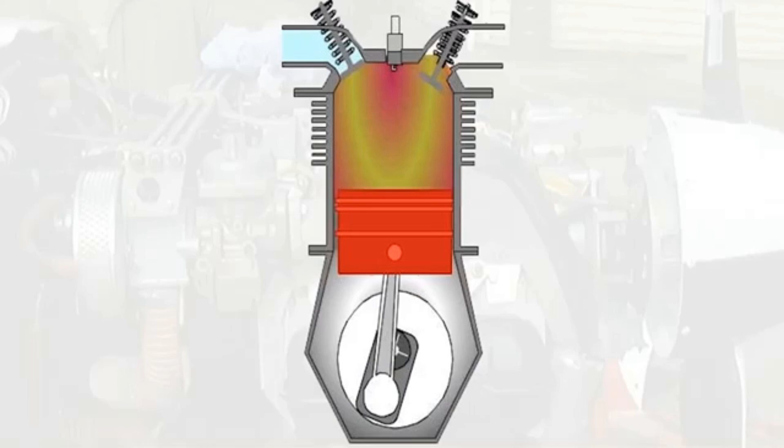A piston engine is a heat engine. Its purpose is to convert the energy released from burning fuel into mechanical energy, and by so doing, generate power that we can use.

The thermal efficiency of a light aircraft piston gasoline engine may reach 30%. This means that 70% of the heat energy released by the fuel is wasted. Around 40% will leave with the exhaust gas, but 30% stays behind to raise the temperature of the engine components and the oil.

If nothing was done to alleviate this situation, then several problems could occur. Engine components could start to fail structurally. The oil could break down and lose its lubricating properties.

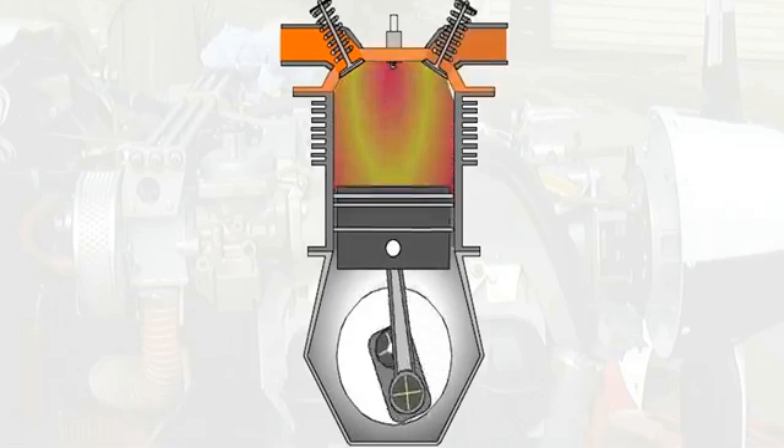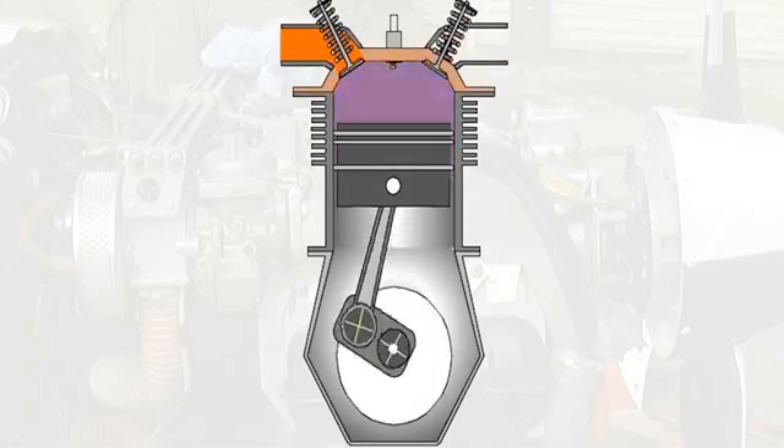The fuel could ignite as soon as it entered the cylinder, before the spark plug fires. This is called pre-ignition. Pre-ignition causes loss of power and may exacerbate the overheating problem. The incoming mixture may get too hot, which will cause unstable combustion, usually called detonation or pinking. This too will cause loss of power and further overheating.

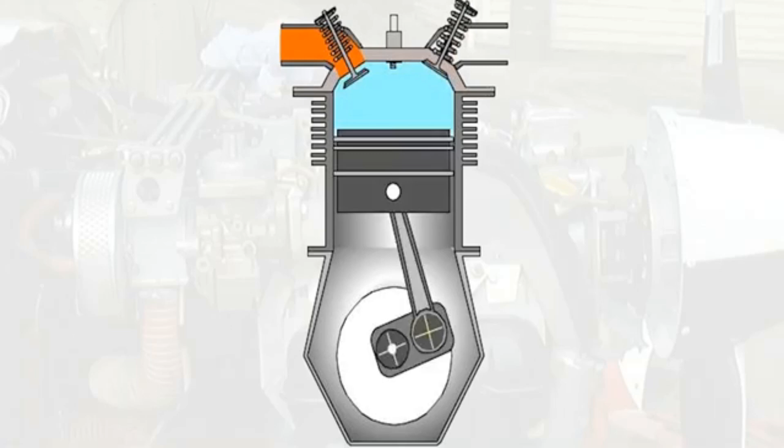So far, we've only considered what would happen if the engine overheated. Let's now look at the problems of overcooling.

Maximum thermal efficiency is only achieved at high engine temperatures. Low engine temperature increases the viscosity, the internal friction of the oil, which will reduce the brake horsepower.

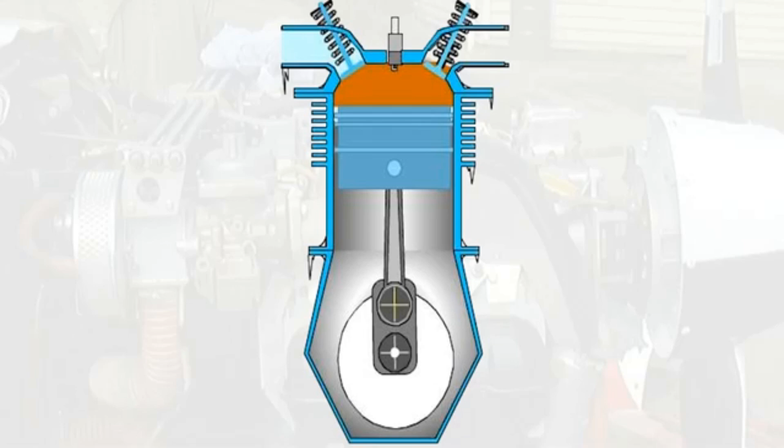To burn, the fuel must vaporize. Very low engine temperatures would prevent complete vaporization, and some of the fuel would not be burnt, reducing the power output of the engine.

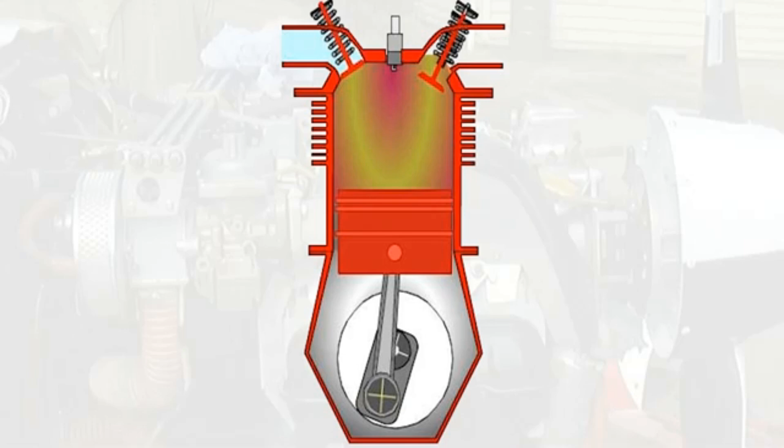To work efficiently, the engine needs to be at the highest temperature consistent with safe operation. To maintain the engine temperature within a range which will satisfy its working requirements, a cooling system is required.

Most light aircraft engines are air-cooled. The simplicity of the system makes it virtually maintenance-free, and it's much lighter than the alternative, the liquid cooling system.

Having said that, the liquid cooling system is more efficient. It gives more precise control of engine temperature and generates less drag. Thus it's used on high-performance engines.

One of the major factors governing the efficiency of an air-cooled system is the air temperature. Although the ambient air temperature can vary widely with changes in climate and altitude, it must be borne in mind that dissipation of the heat will be more rapid as air temperature decreases.

The speed of the airflow is the other major factor affecting the efficiency of the air cooling system. Uncontrolled, the speed of the airflow over the cylinders will vary with the speed of the aircraft, and therefore cause the temperature of the cylinders to fluctuate accordingly.

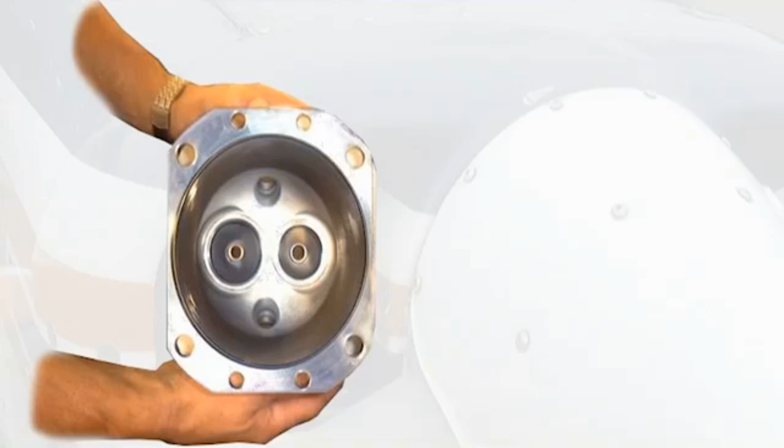Several methods of improving the efficiency of cooling systems can be employed. Firstly, the engine components are made of materials with a high conductivity. For instance, cylinder heads are sometimes made from aluminium alloys.

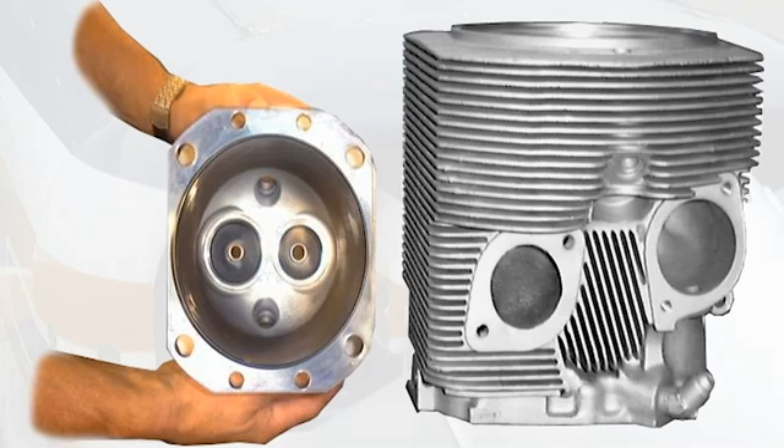The walls of the cylinders are finned to increase the cooling area. The fins are thin in section and may be extended to increase their area at local hotspots, such as the exhaust ports, in an attempt to achieve an even temperature throughout.

It must not be forgotten that the oil used to lubricate the engine is also a cooling medium.

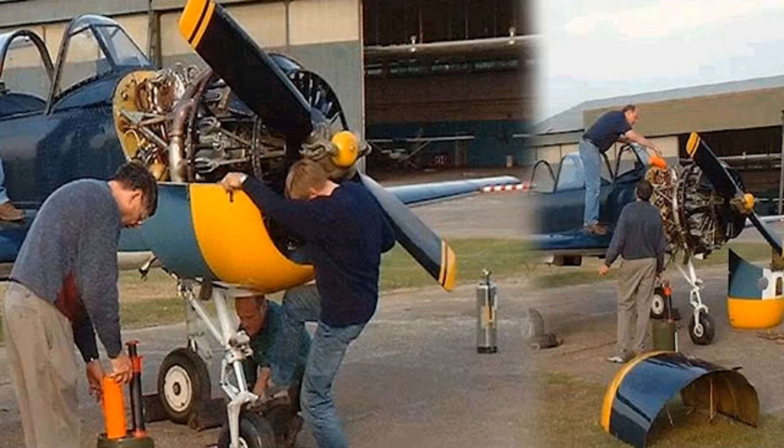The engine is streamlined by surrounding it by a cowling. This puts it within a controlled environment and also reduces the drag which it would otherwise generate.

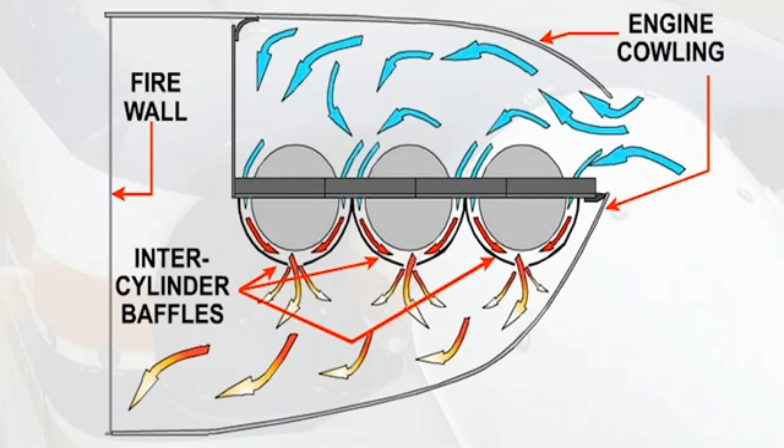Baffles are directional air guides which direct the airflow fully around the cylinder. They must be close-fitting and are sealed against the cowling to ensure that all of the airflow is over the cylinders and that each part of the cylinder is supplied with equal amounts of cooling air.

Cowl flaps and gills can be fitted to the cowlings to ensure control of the temperature. They are usually manually controlled on light aircraft, and when open, the airflow over them causes a pressure drop which accelerates the airflow within the cowlings.

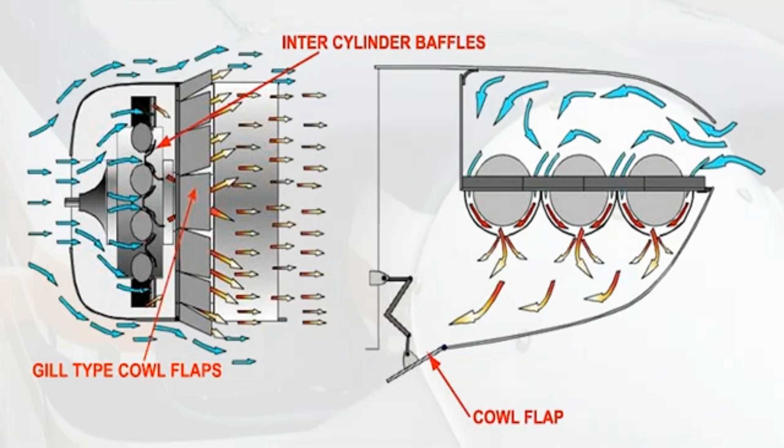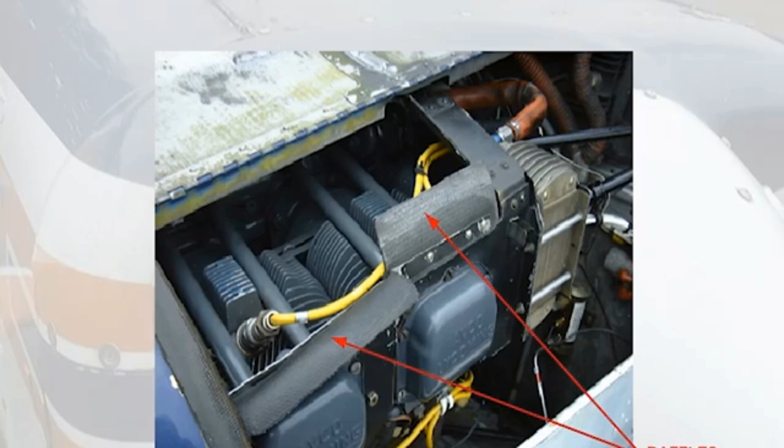Prior to engine start, the air inlet and outlet to the cowlings must be checked to be clear of obstruction. The condition of baffles and cowling must be checked. The operation of the cowl flap, if fitted, must be checked. Remembering that, as well as lubricating the engine, oil plays an important part in engine cooling, check the oil contents.

In high power settings with low airspeed conditions, such as occur at takeoff, the cowl flaps should be selected open to increase the flow rate over the cylinders and so increase cooling.

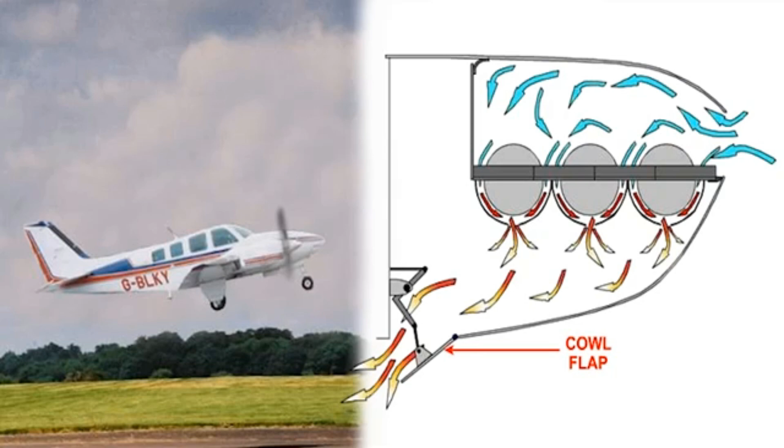In the climb and cruise, the cowl flaps or gills can be adjusted to maintain the engine temperature at the optimum.

In descent, engine power is reduced and less heat is generated. If the aircraft is placed into a dive, this will tend to overcool the engine, and this can lead to what is known as thermal shock. Thus, the cowl flaps should be closed during descent to reduce the cooling effect.

Anticipating a go-around, the cowl flaps should be opened on final approach.

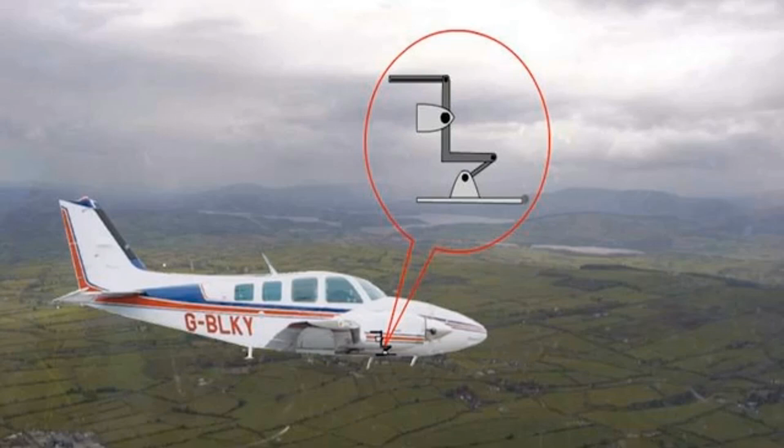During ground running, engine oil temperatures and cylinder head temperatures should be closely monitored to ensure the limitations are not exceeded. Although initially after engine start the cowl flap should be closed to encourage quick engine warm-up, they should subsequently be opened to prevent overheating.

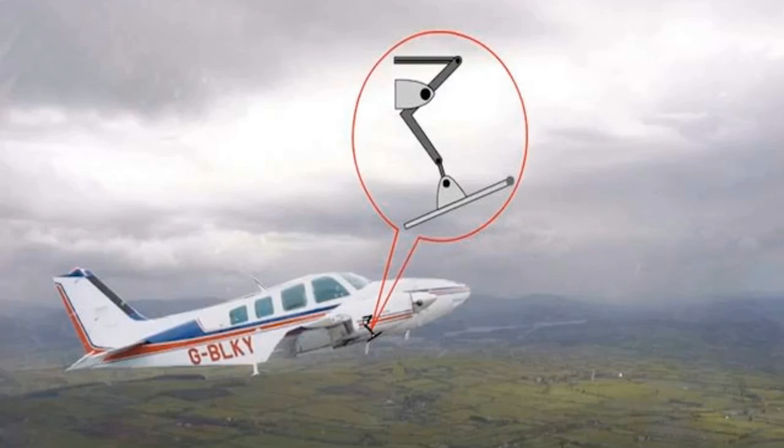During flight, if the cylinder head temperature becomes excessive, there are several methods of cooling the engine. Obviously, as has just been stated, the cowl flaps can be opened. Perhaps less obviously, the mixture can be richened. The excess fuel will evaporate and cool the charge. It's also logical to expect that a reduction in engine power will tend to lower engine temperatures, and likewise an increase in forward speed will have the same effect.